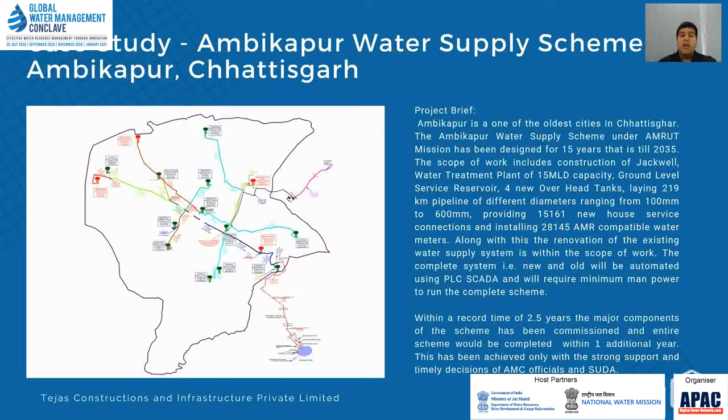Major components of the scheme have been commissioned in the record time of 2.5 years, and the entire scheme would be completed in the next 1 year. This has been achieved only with the strong support and timely decision making of Ambikapur Municipal Corporation officials and State Urban Development Agency, Chhattisgarh government.

So, GIS is Geographical Information System. The basic function of GIS is to add location to any information that is available with the user. Google Maps is a very beautiful example of a GIS-based tool where location and other information of various buildings, roads, rivers, etc. is shown on the map. I'll take you through various examples of how GIS can be used and how we have used GIS in our Ambikapur project.

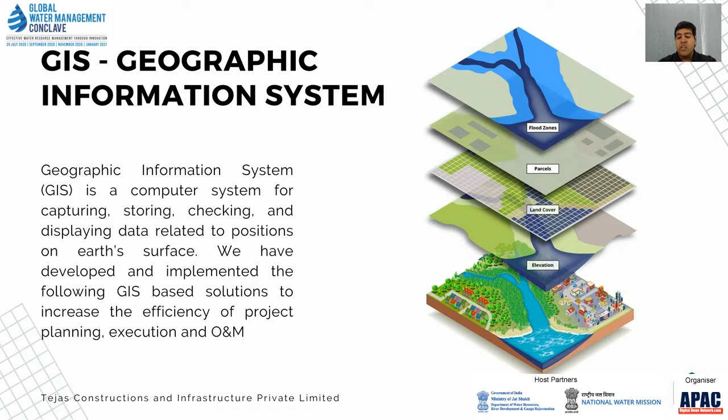For designing any augmentation project, knowledge of the existing pipe network including the location of existing pipeline, type of pipeline, size of pipeline is very critical for designing the additional network. During designing of Ambikapur, we did not have the information of the existing pipeline network, and hence we had to manually take trial pits to identify existing pipeline and other details of the network, which took substantial time. You can see how a digitized network of existing pipeline looks in the GIS on the left image. The GIS-based map of existing pipeline and underground utility is very critical for augmentation of the existing network.

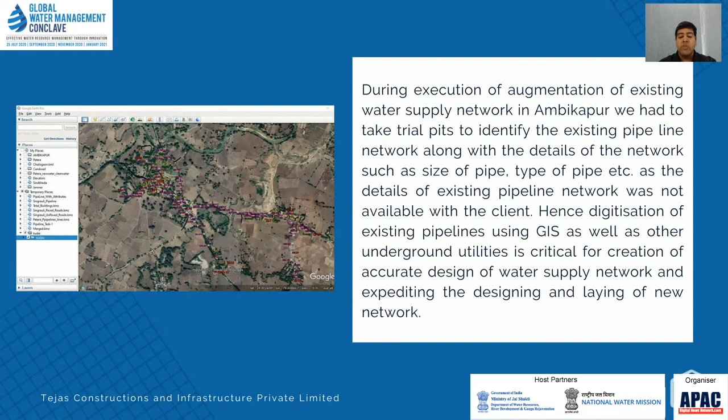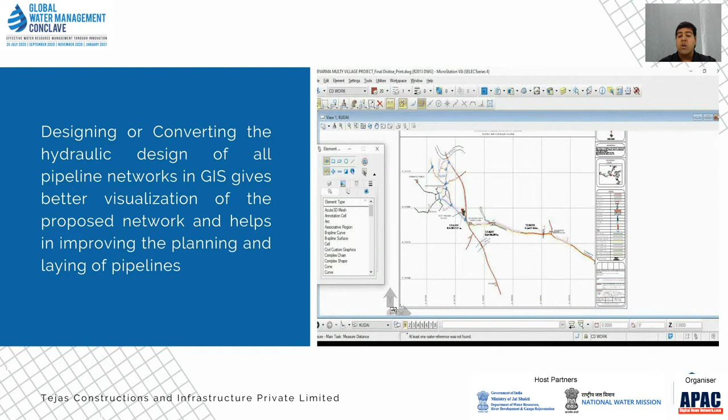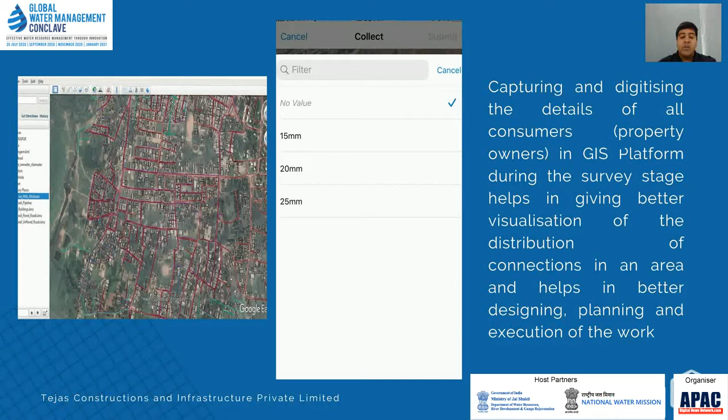Similarly, designing or converting hydraulic design of all pipeline network in GIS gives better visualization of the proposed network and helps in improving the planning and laying of the pipeline. We have developed a solution to capture the details of property owners using a mobile app-based GIS tool. It captures the location data along with the other details of consumers as required by the client. The details are then digitized on a high-quality satellite image or drone-based map, which provides a very good visualization of the consumers, which can greatly help in installation of house service connections and during the operation maintenance phase of the scheme.

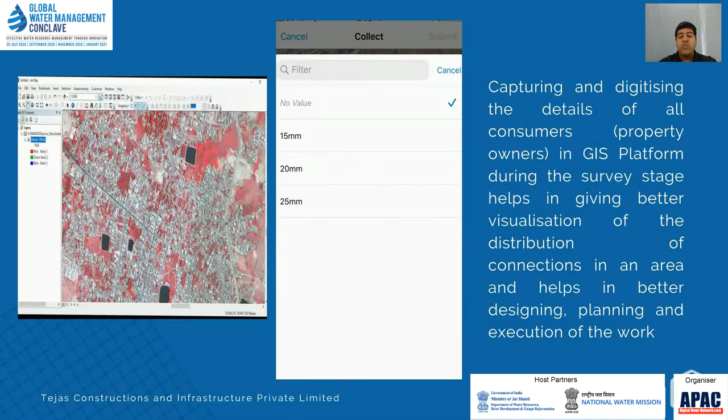We have also developed a solution to capture and digitize the details and images of the connection and consumer meter installed at each property and linking the same with the consumer database. This provides very good documentation and helps the client as well as the contractor during execution of the work, operation maintenance phase, and consumer grievance redressal.

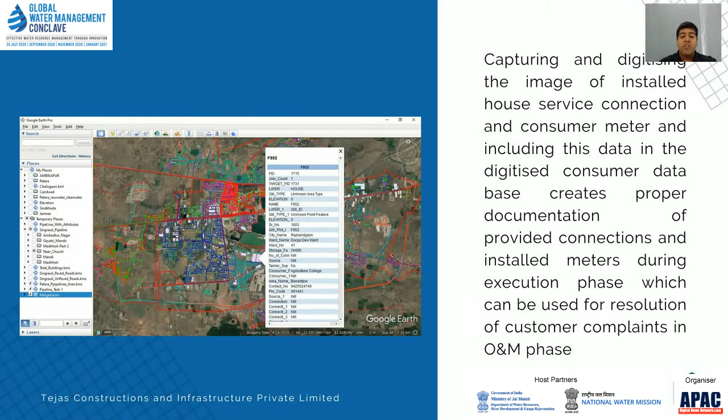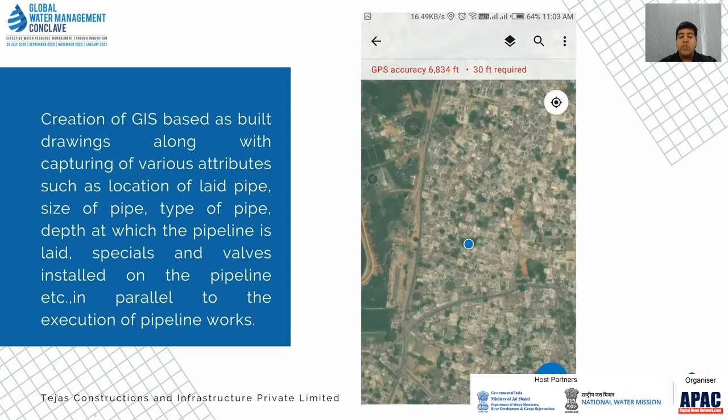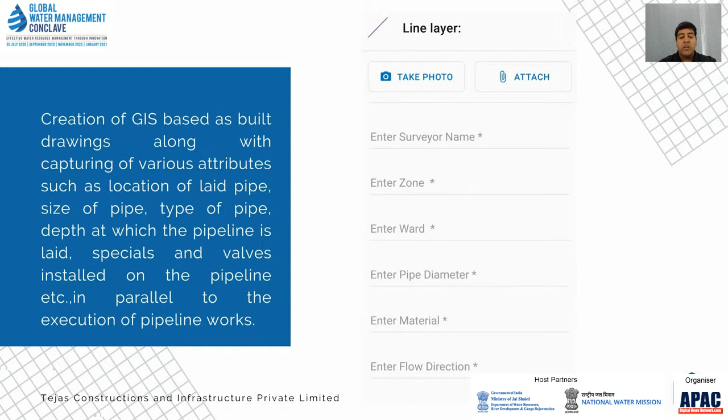It is also important to create the as-built drawings of the pipeline along with details such as location of the laid pipe, size of the pipe, depth at which the pipe is laid, specials, valves installed on the pipeline, etc. In parallel to execution of the pipeline work, you can see the screens of the app used by us for capturing the data and creating the as-built drawings.

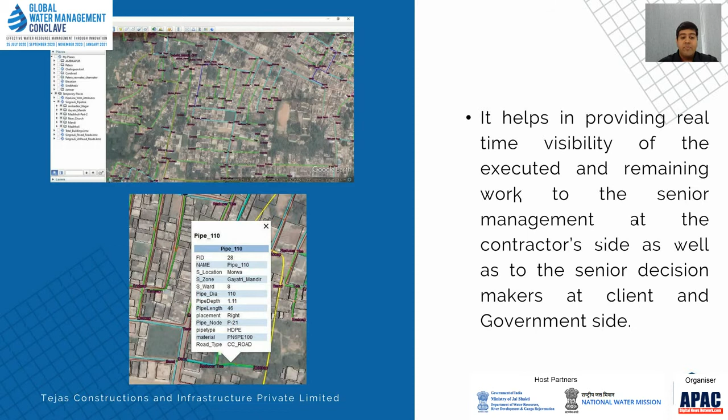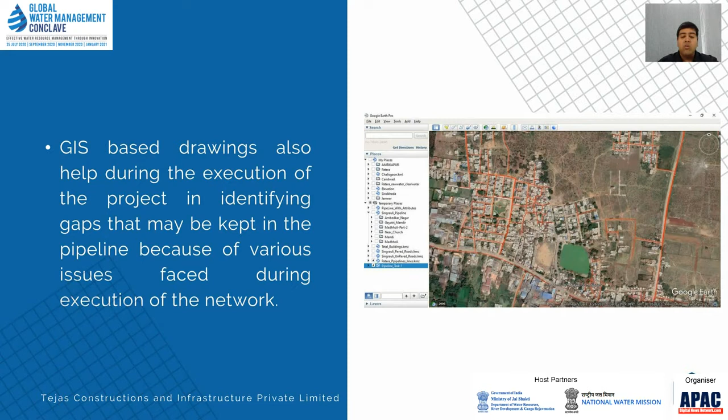GIS-based drawings also help during execution of the project in identifying gaps that may be kept in the pipeline because of various issues faced during execution of the network. This is a very critical issue in water supply, as many times this information is only known to a particular engineer or a subcontractor who may stop working for the contractor before completion of the project.

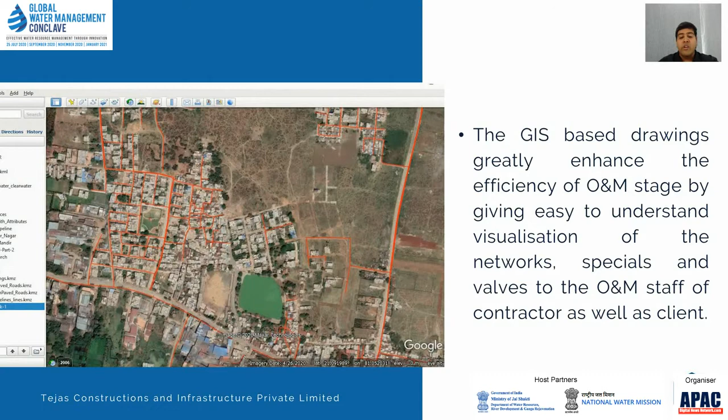The GIS-based drawing greatly enhances the efficiency of the operation and maintenance stage by giving easy to understand visualization of the network, specials, and valves to the O&M staff of the contractor as well as client.

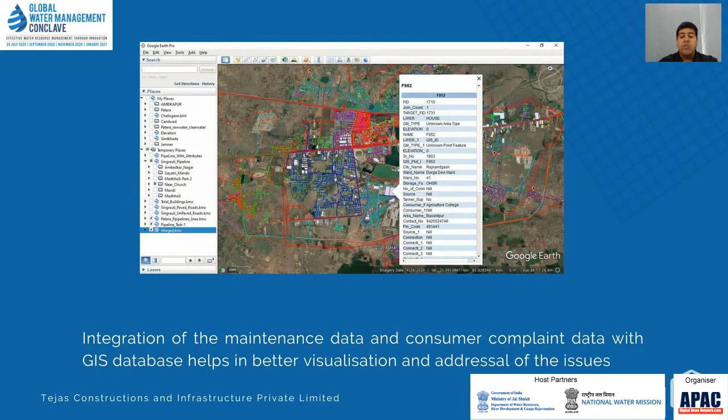Integration of the maintenance data and consumer complaint data with the GIS database helps in better visualization and addressal of this issue. As you can see in the images, the details of consumers and history of complaints raised by consumers can be digitized and referred to in a GIS platform, giving better visualization to the operation and maintenance staff.

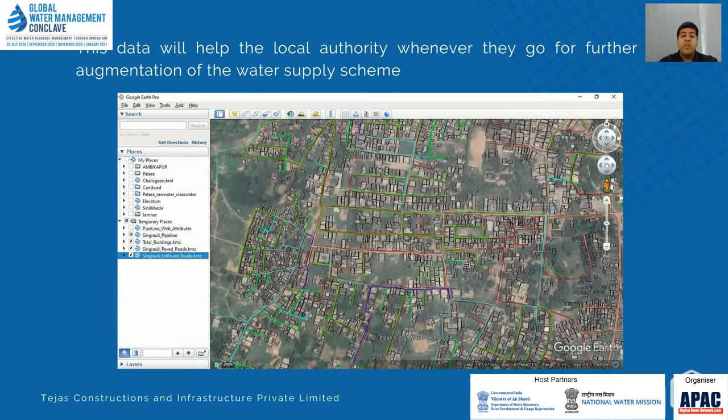Similarly, digitization of the complete data will help local authorities whenever they go for further augmentation of the water supply scheme. Now we come to BIM.

BIM, that is Building Information Modeling, is the creation of a digital model or a digital twin of an existing or proposed structure. We have extensively used BIM in our Ambikapur project.

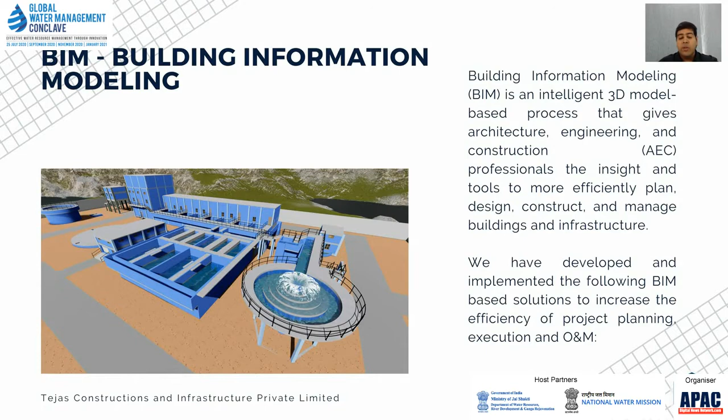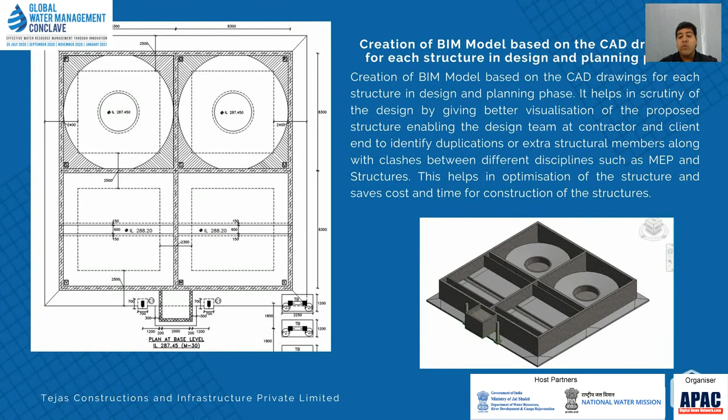Creation of a BIM model of a structure based on the CAD drawing helps in scrutiny of the design by giving better visualization of the proposed structure. As you can see at the bottom right corner, this enables the design team to better scrutinize the structure, identify duplication or extra structural members, and also the clash between different disciplines such as MEP and structures. This helps in optimization of the structure and saves cost and time for construction of the structure.

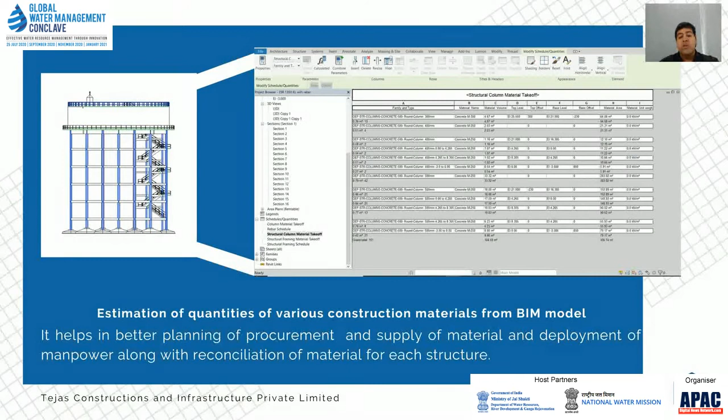The BIM model also helps in estimation of quantities of various materials required for a structure. As you can see in the image, material quantities for a column are estimated using the BIM tool. It helps in better planning of procurement and supply of material and deployment of manpower, and also in reconciliation of material for each structure. The BIM model can also be integrated with the project schedule.

As you can see in the video, it gives better visualization to the planning and execution team on how much work would be completed each day. This substantially improves the planning and execution of the project.

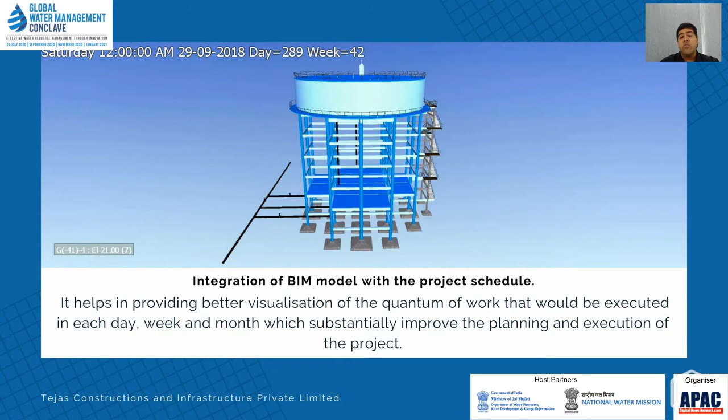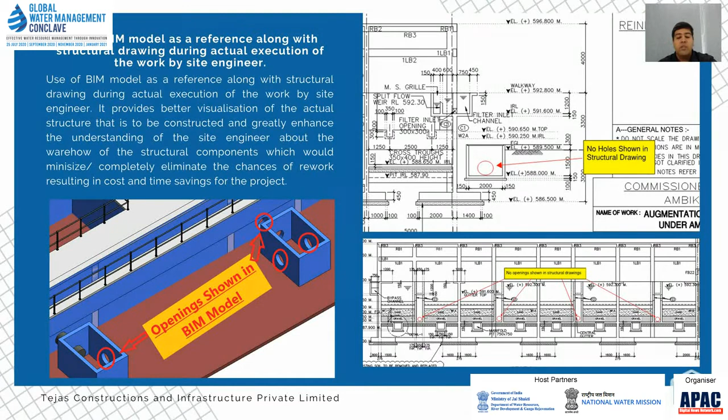Many times, openings that are required to be kept in a structure are not shown in the structural drawings. As can be seen in the image, the opening for installation of pipes, as shown in the BIM model, is not shown in the structural drawings. Many times, due to limited understanding of the site engineers, these openings are not kept in the structure during construction, which then requires breaking or cutting structures, reducing quality and increasing cost and execution time. This can be completely avoided using BIM models.

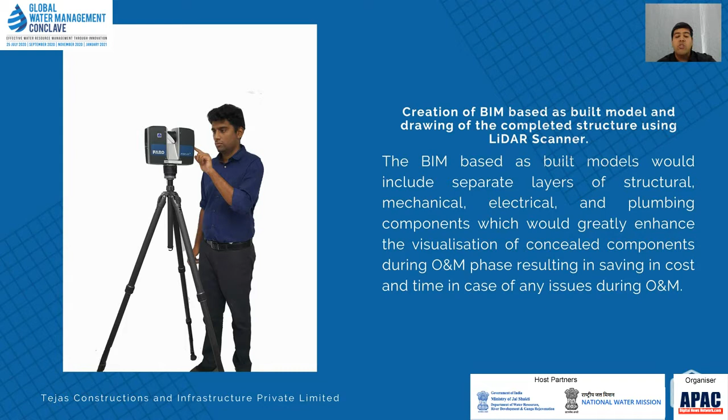Highly accurate as-built models for structures can be created using a LiDAR scanner. Here you can see the Faro Focus S350 LiDAR scanner that we have. Separate digital layers of structural, mechanical, electrical, and plumbing components can be created in the as-built model. These layers enhance the visualization of concealed components such as piping or electrical lines during operation and maintenance, saving cost and time in case of any issue during operation and maintenance.

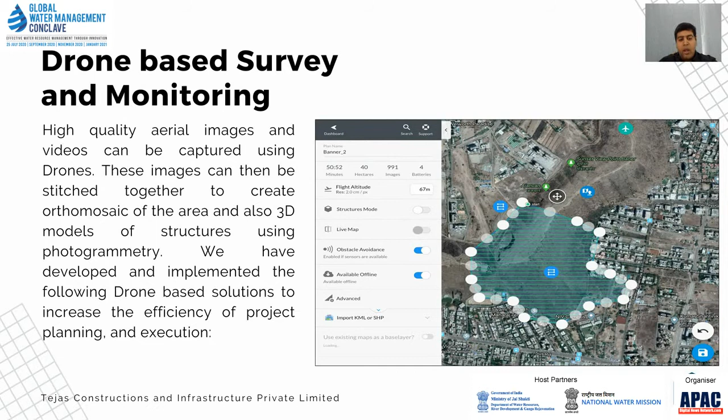Now we come to drone-based survey. High quality aerial images and videos can be captured using drones. These images can be stitched together to create an orthomosaic of the area. 3D models of the structure can also be created using photogrammetry software. I'll take you through various examples of how we have used drones in our project.

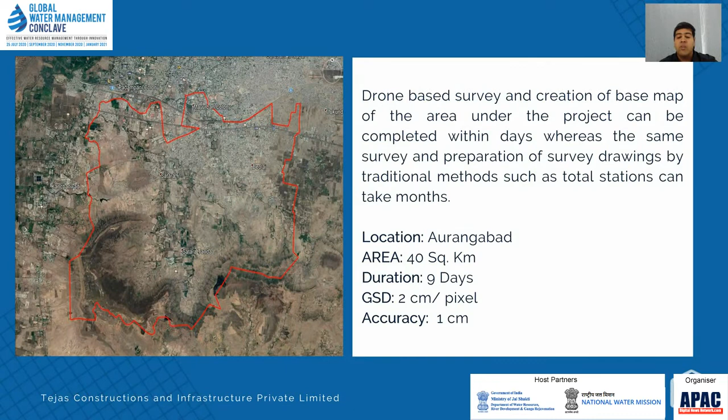Drone-based survey and creation of a base map of the area under the project can be completed within days. The same survey and preparation of a survey drawing by traditional methods, such as total station, can take months. This is an example of a drone survey we recently did in Aurangabad for an area of 40 square kilometers. Survey of a similar area by traditional methods takes about 2 months. This project was completed in 9 days.

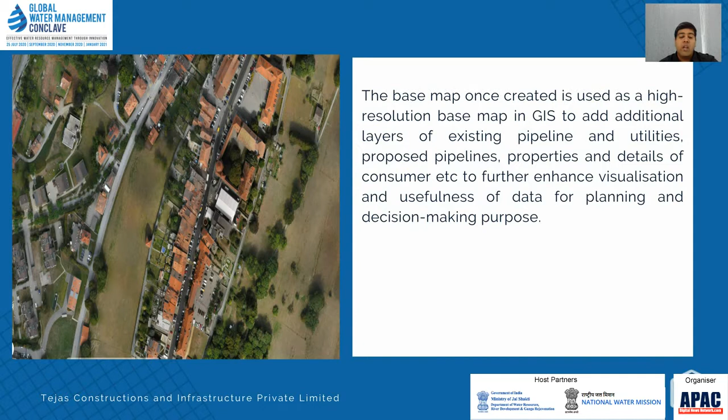By stitching images captured by drones, a high-resolution base map can be created. The base map can be utilized in a GIS platform. Pipeline and other layers can then be added to it. It gives the base map with the most recent data, which can greatly help in planning and identification of obstacles.

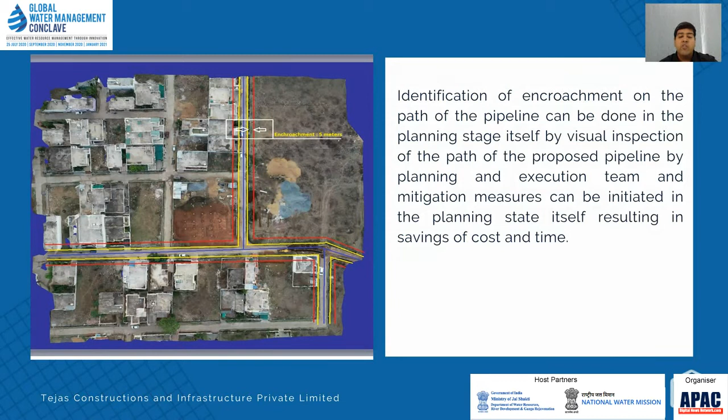As you can see in the image, identification of encroachment on the path of the pipeline can be done in the planning stage itself by visual inspection of the path of the proposed pipeline. Mitigation measures can be initiated in the planning stage itself, resulting in saving of cost and time.

Aerial images can also be used for a quick review of the site to check stacking of material, safety measures, and current physical progress on the site. A time lapse can be created using images taken periodically, daily, weekly, or monthly, to check the physical progress of the site over a time period. It provides better review and supervision of the project.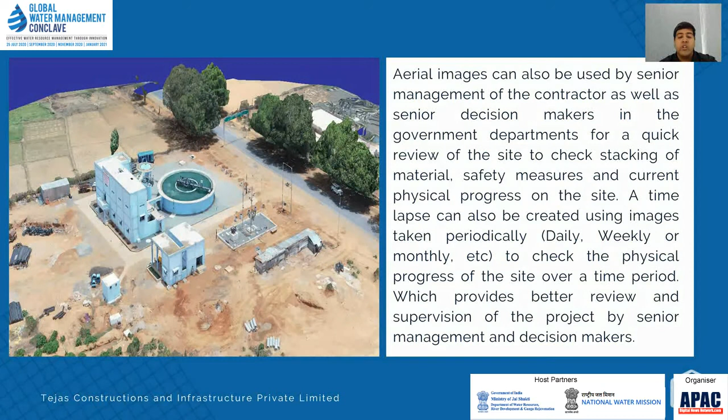As can be seen in the images, 3D models created using the images captured by drones can be used for quick dimensions and volume estimation using photogrammetry software. This improves the site monitoring efficiency of the contractor.

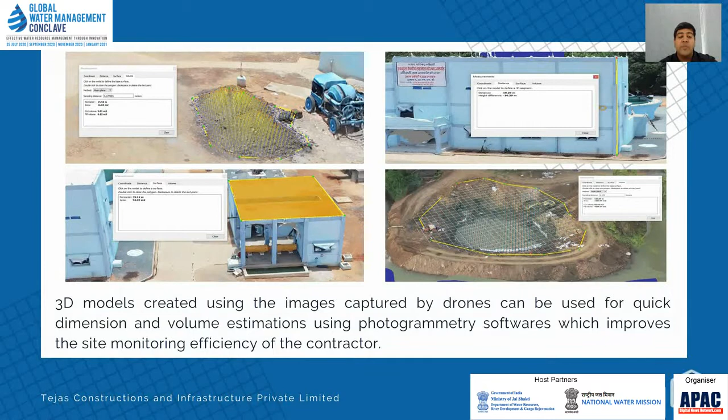So we'll talk about PLC SCADA now. We have completely automated the functioning of water supply scheme with manual override using PLC and SCADA, Supervisory Control And Data Acquisition. SCADA is a control system architecture comprising computers, network data communication, and graphical user interface for high-level process supervisory management. Programmable logic controllers are hardware devices which help SCADA interface with process, plant, or machinery. I will take you through how we have implemented PLC SCADA in our project.

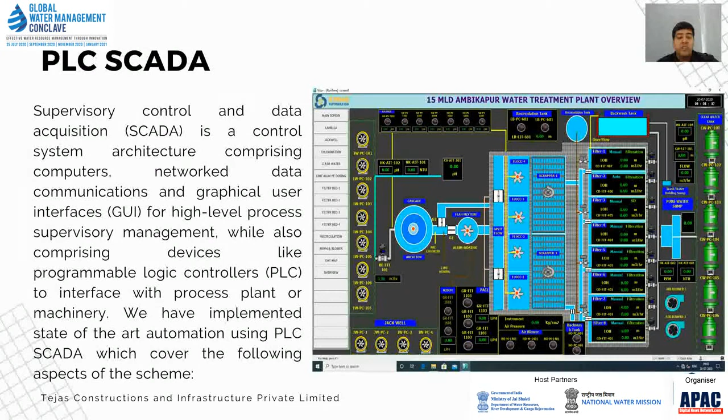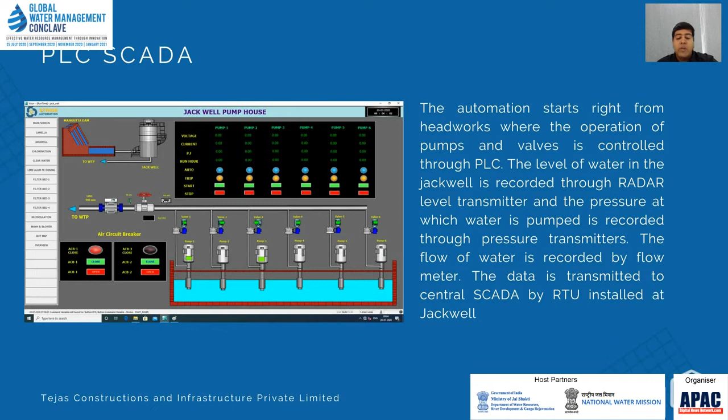The automation starts right from headwork, where operation of pumps and valves is controlled through PLC. The level of water in jackwell is recorded through radar level transmitter. The pressure at which water is pumped is recorded through pressure transmitter. The flow of water is recorded by flow meters. The data is transmitted to central SCADA by RTU installed at jackwell.

The entire operation of water treatment plant is automated using PLC and SCADA. At the inlet of the water treatment plant, the turbidity and pH of the raw water is recorded by pH and turbidity transmitters. The alum and lime dosing in the raw water is then adjusted by the system dynamically based on these parameters. This eliminates the possibility of excess dosing of chemicals.

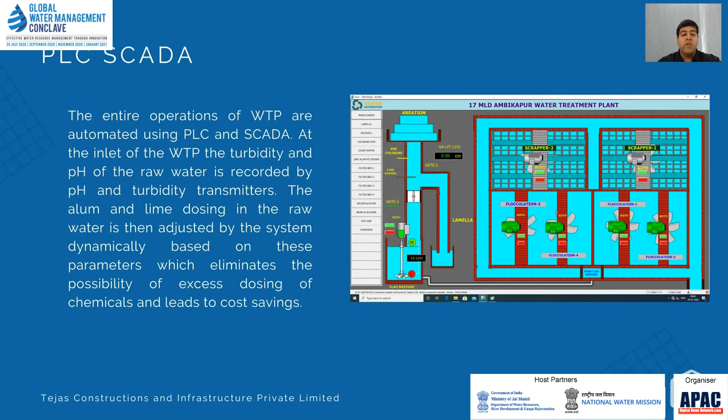The differential pressure transmitter installed on each filter calculates the pressure drop across the filter. On detecting pressure drop higher than the preset limit, the SCADA initiates automated backwash of the system using air blowers and backwash arrangement. All valves of the entire WTP, air blowers and backwash pumps are controlled by SCADA through PLC.

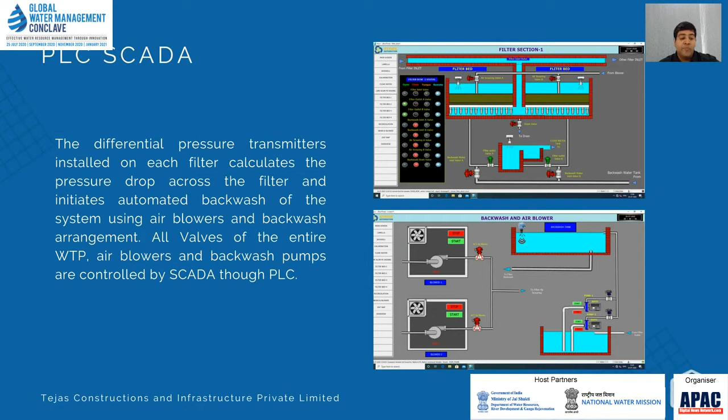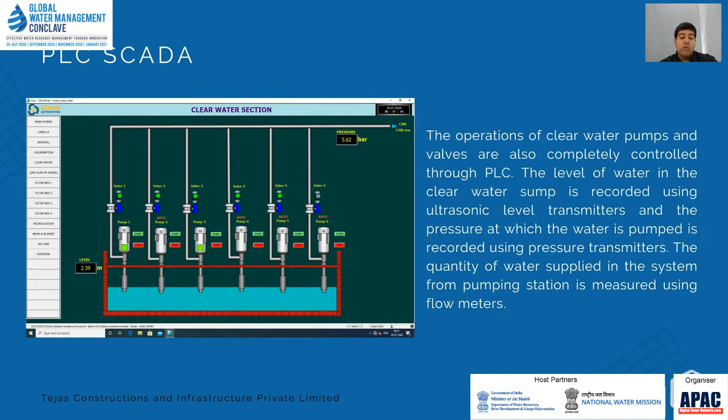The operation of clear water pumps and valves are also completely controlled through PLC. The level of water in the clear water sump is recorded using ultrasonic level transmitter, and the pressure at which the water is pumped is recorded using pressure transmitter. The quantity of water supplied in the system from pumping station is measured using flow meters.

To maintain equitable water supply to all OHTs, we have installed flow control valves based on Israeli technology at the inlet of each OHT. The operation of flow control valves is automated. It takes flow and pressure data of the inflow of water and the level of water in the OHT as input. Based on these inputs, the opening of flow control valves is adjusted so that the required flow and pressure is maintained for each OHT.

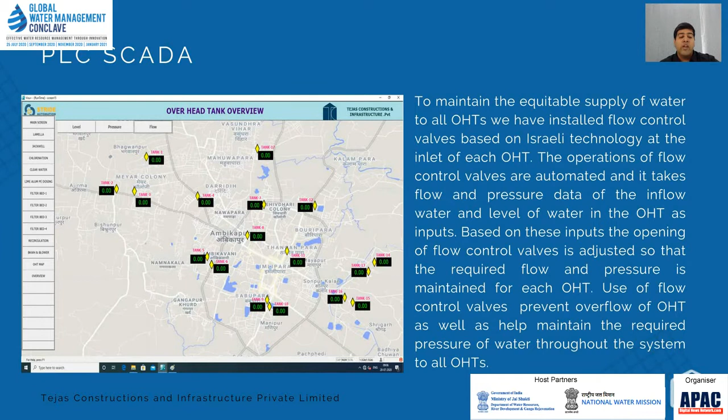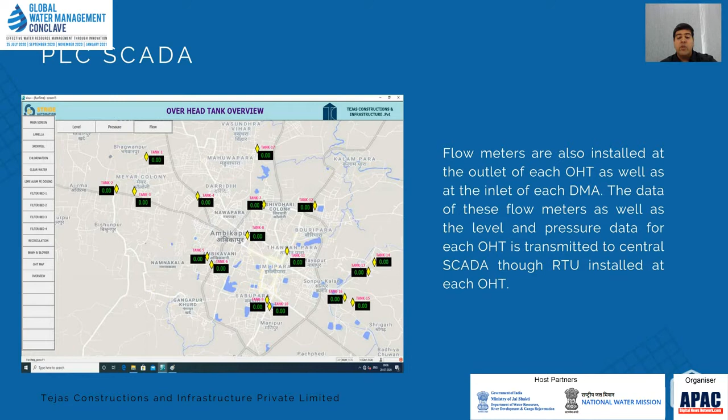Use of flow control valves prevents overflow of OHT as well as helps to maintain the required pressure of water throughout the system to all overhead tanks. Flow meters are also installed at the outlet of each OHT as well as the inlet of each DMA. The data of these flow meters, as well as the level and pressure data of each OHT, is transmitted to the central SCADA through RTU installed at each OHT. Using PLC SCADA, the entire system can operate the scheme 24/7 with minimal or no supervision and manual intervention.

Creation of DMA in distribution. Non-revenue water, commonly known as NRW, is a big challenge before public bodies. For many urban local bodies, NRW is as high as 60% in India. Ambikapur is also no exception to this and has an NRW of 55%. District metered areas is one of the most promising methods implemented globally for improving the water supply qualitatively and quantitatively and reducing NRW to sub 20%.

As seen in the image, one zone is broken down into 3 DMAs. Each DMA can be isolated from others in two manners, either with the use of isolation valves at its boundary or by cutting off pipes connecting the DMA to other DMAs. Water meters are installed at the inlet of each DMA for monitoring of water supply to identify leakage and control the NRW.

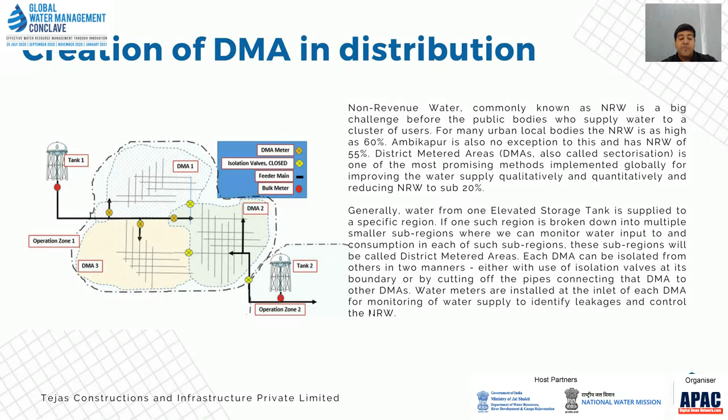In Ambikapur, 37 DMAs were created for 16 zones based on the elevation of the area and distance from OHT. Rider lines from overhead tanks were provided till a high elevation point in each DMA. The branching of network was started from the same point to provide equitable water to all connections in each DMA.

Salient features and achievements of the design include minimum pressure of 12 meters achieved at most of the nodes, hydraulic gradient less than 5 meters per kilometer achieved, and max velocity below the limiting value of 1.8 meters per second achieved. On commissioning of the complete network, non-revenue water is expected to reduce from current 55% to 20%.

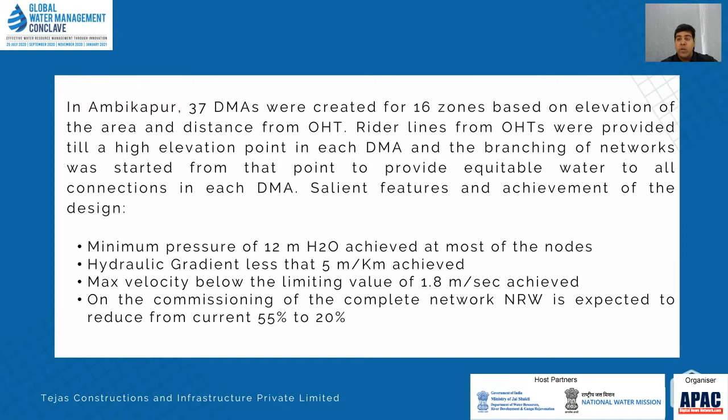Traditionally, a single clariflocculator is provided in the water supply scheme. A typical clariflocculator is shown in the image on the left side. It requires large area for construction. During the maintenance of the clariflocculator, the system has to be stopped and the raw water is directly sent to filters bypassing the clariflocculator, resulting in incomplete treatment of water and reducing the quality.

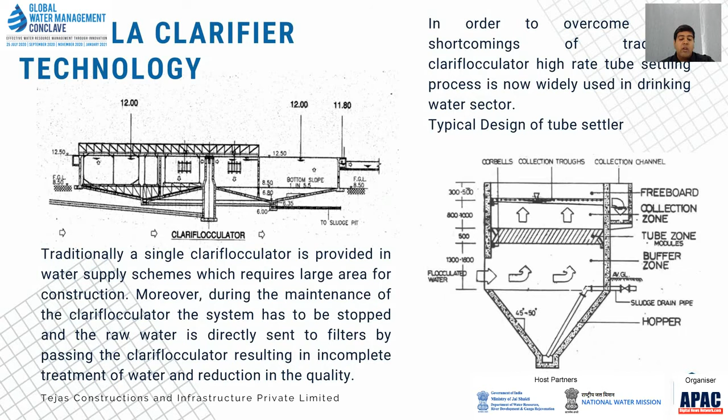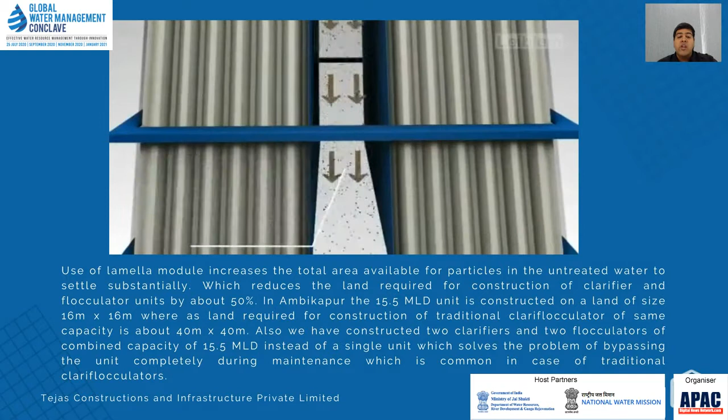In order to overcome this shortcoming of traditional clariflocculator, high-rate tube settler process is now widely used in the drinking water sector. The functioning of a typical tube settler unit is shown in the video. Use of lamella modules increases the total area available for particles in the untreated water to settle substantially, which reduces the land required for construction of clarifier and flocculator units by about 50%.

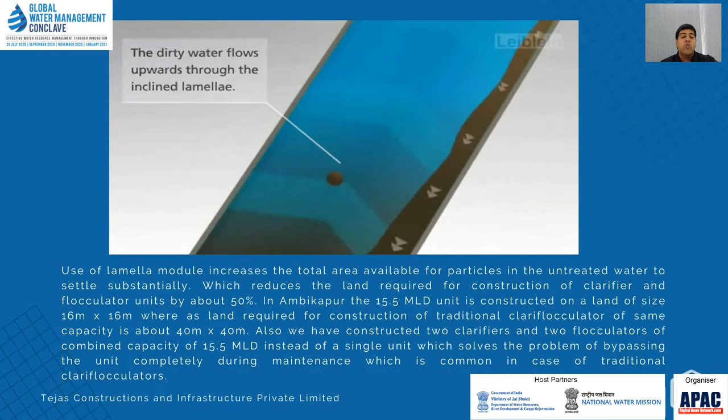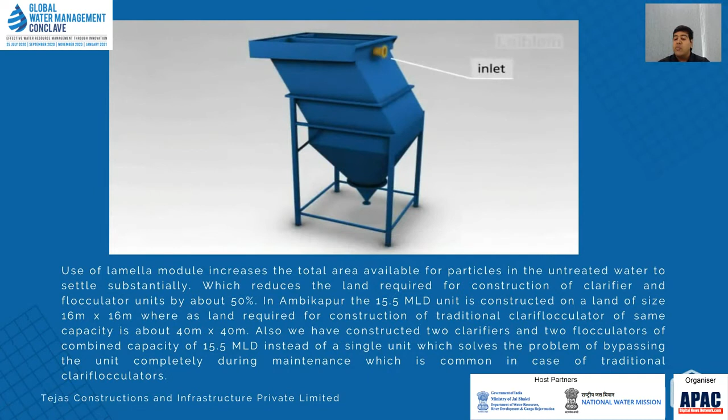In Ambikapur, the 15.5 MLD unit is constructed on a land size of 16 meter by 16 meter. For similar clariflocculators of the same capacity, land area required is about 40 meter by 40 meter. Also, we have constructed 2 clarifiers and 2 flocculators of combined capacity of 15.5 MLD instead of a single unit, which solves the problem of bypassing the unit completely during maintenance, which is common in the case of traditional clariflocculators.

Construction of OHTs require labor with specialized skills. Due to limited availability of the skilled manpower, the construction of OHTs can become a bottleneck for projects where a large number of OHTs are to be constructed in a relatively short span of time, which can result in cost and time overrun for the project.

In order to overcome the same, we have identified advanced formwork for the construction of columns and formwork based on Spanish technology for construction of containers of OHTs. This formwork reduces the requirement of traditionally skilled manpower for construction of OHTs. It also reduces the time required for construction of OHTs and improves the quality.

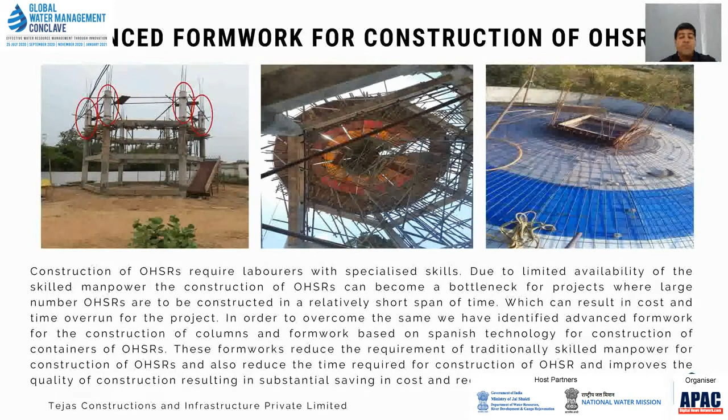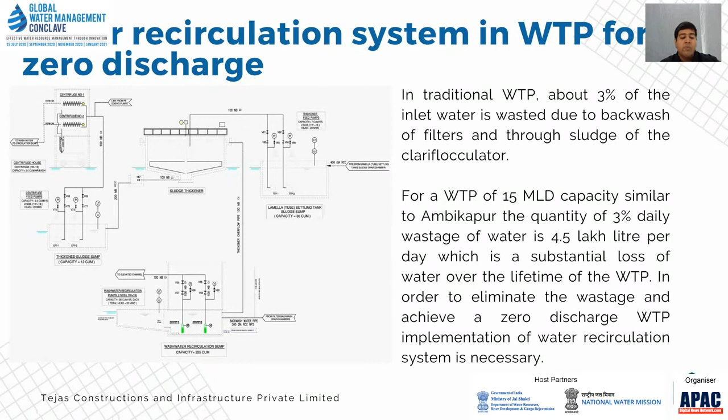As can be seen in the image, the recirculation system consists of a sludge sump, where sludge from the lamella settling tank is collected. The sludge is then pumped to the sludge thickener, where PAC dosing is done in the sludge. The water from the sludge is sent to the wash water recirculation sump. Thickened sludge is then stored in the thickened sludge sump. Finally, the sludge from the thickened sludge sump is pumped to a centrifuge, where the remaining water is separated from the sludge and sent to the wash water recirculation sump. This sludge is collected and used as manure.

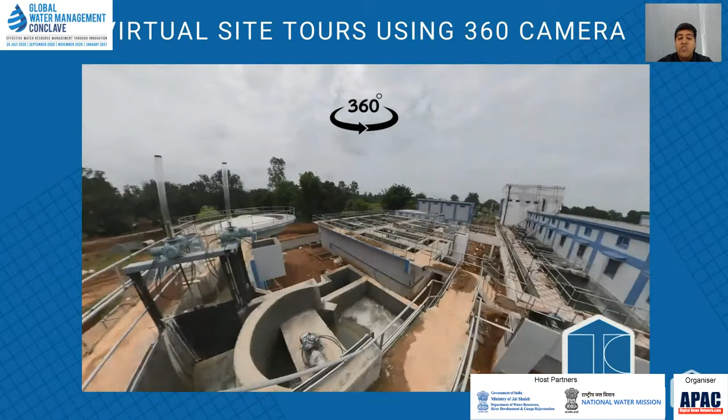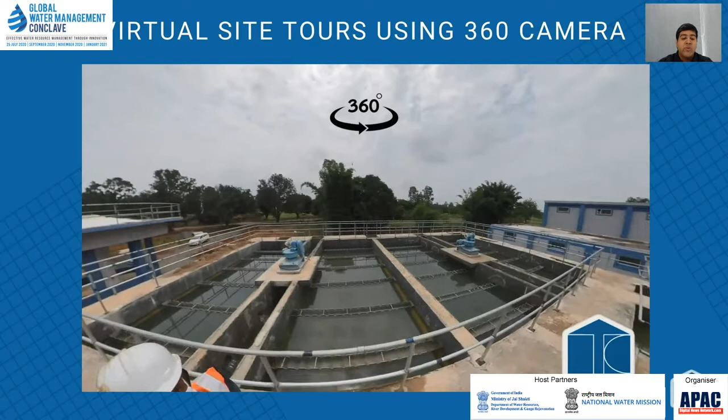And finally, we are coming to virtual site tours using a 360 camera. We have also implemented a solution to get a 360 camera and VR headset based walkthrough of the site. The video is an example of how a walkthrough is conducted. As you can see, the staff at the site carries a 360 camera to capture the current state of the site.

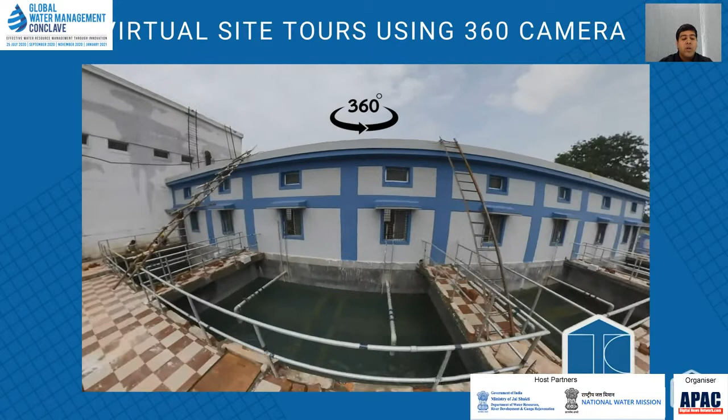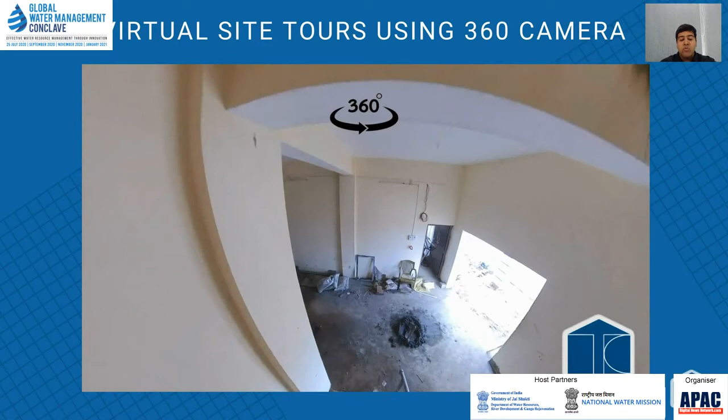The user can get a 360 view of the entire area by simply panning the video. Walkthrough can be done live as well as pre-recorded, and it can also be used for creation of photogrammetric 3D models. This gives a complete walkthrough of sites to the user remotely. This has also helped our management to monitor the execution of the work during lockdown.

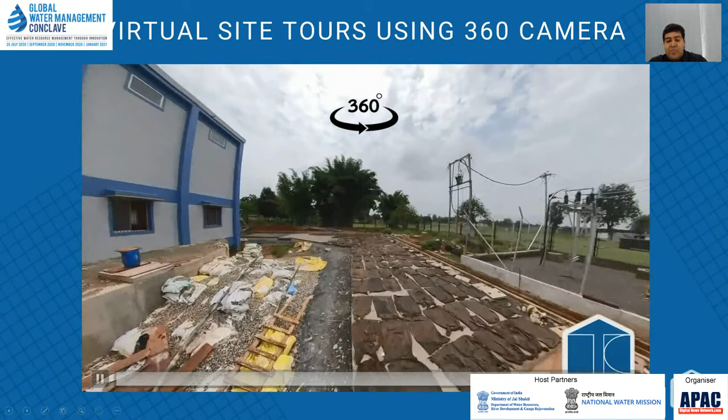This video has been played at 3x speed. Yes.